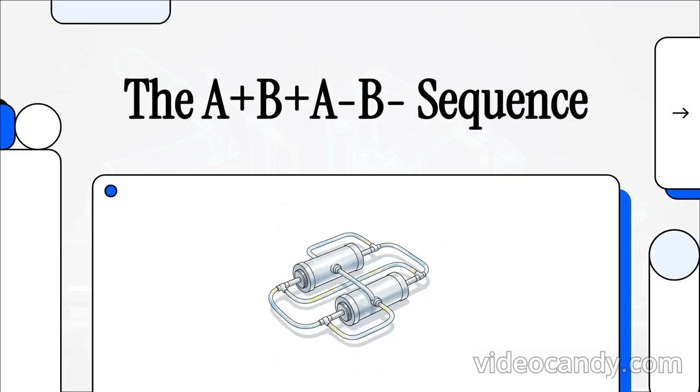All right, welcome. Today, we are diving deep into one of the absolute cornerstones of industrial automation, the A+B+A-B- sequence. We're going to break down, piece by piece, how simple compressed air and a few mechanical switches can get two cylinders to work together in perfect automated harmony.

So think about this for a second. How do you get, say, a clamp to hold a part, then a stamp to come down and mark it, and then have both of them release in exactly the right order over and over again without a single line of code? It's a classic problem in factories everywhere, and the solution is, well, it's surprisingly elegant. It relies on pure mechanical cleverness, not fancy electronics.

So here's how we're going to tackle this. First, we'll set the scene with the automation challenge itself. Then, we'll decode the actual circuit diagram, breaking the sequence into its two main phases. And finally, we'll look at how this awesome logic is used out in the real world.

Okay, before we can solve this puzzle, we really have to understand what we're dealing with. And that means defining the job we need to do and learning the special shorthand that engineers use to describe these kinds of movements. Let's imagine a really simple factory job. A machine needs to clamp a workpiece tight. That's cylinder A.

Then a second tool, maybe a stamp, has to come in and do its job. That's cylinder B. Now, what's absolutely critical here is that the stamp has to pull back before the clamp lets go. The order is everything. Get it wrong and you've got a mess. And this is how we write it down. It might look simple, but this little code is incredibly powerful.

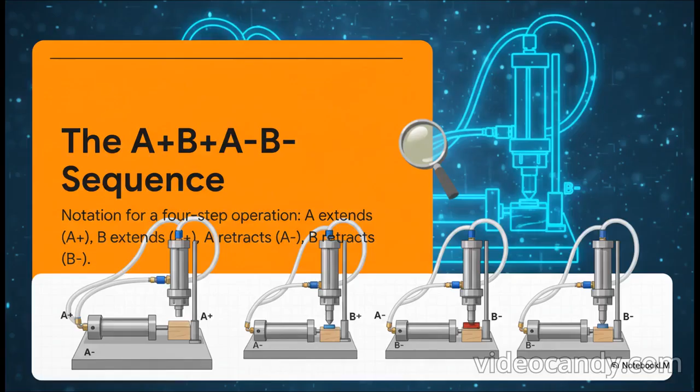A is our clamp. B is the stamp. A plus sign just means the cylinder extends, it moves forward. A minus sign means it retracts, it moves backward. So A+, B+, A-, B-. That perfectly describes our whole clamp and stamp operation.

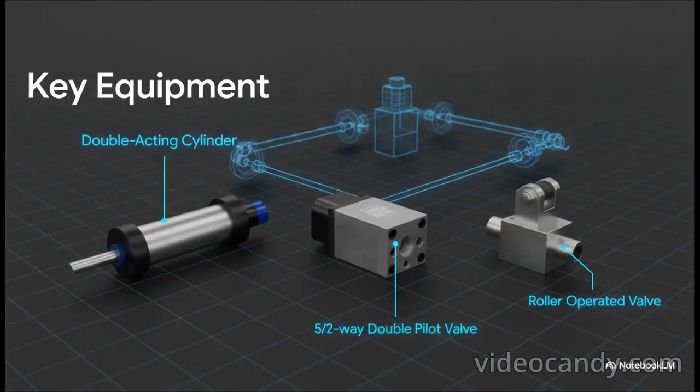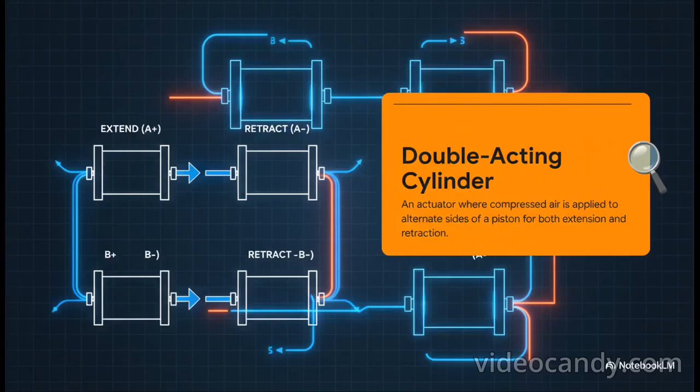These are the stars of our show. We have two double-acting cylinders. Those are the muscles that do the actual moving. Each one has a 5/2-way valve that's kind of like its brain. It directs the air to either push or pull the piston. And here's the really crucial part. We have 4 roller-operated valves. Think of these as physical sensors or tripwires. They're the ones that tell the system when a cylinder has hit its mark.

So what exactly is a double-acting cylinder? Well, it's pretty simple. It's a piston that can be pushed in two directions using air. You apply compressed air to one side to push it out, and then you apply air to the other side to pull it back in. It gives us powered motion for both extending and retracting.

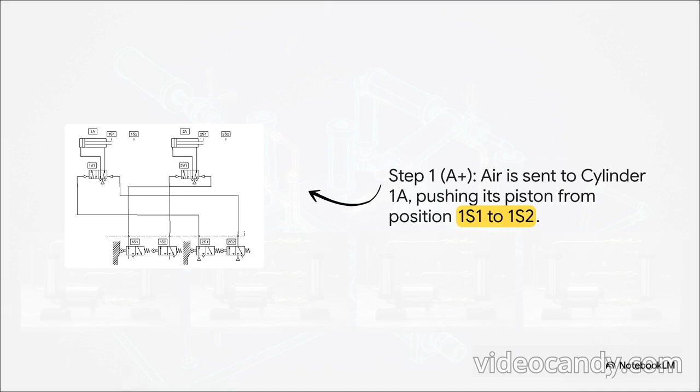Okay, here we go. We're kicking off the sequence. Now watch closely how the very first action automatically sets up the trigger for the next one. It's like setting off a line of mechanical dominoes. And we're off. Air flows to the main valve for cylinder 1A. That valve shifts, sending a powerful burst of air to the back of the piston.

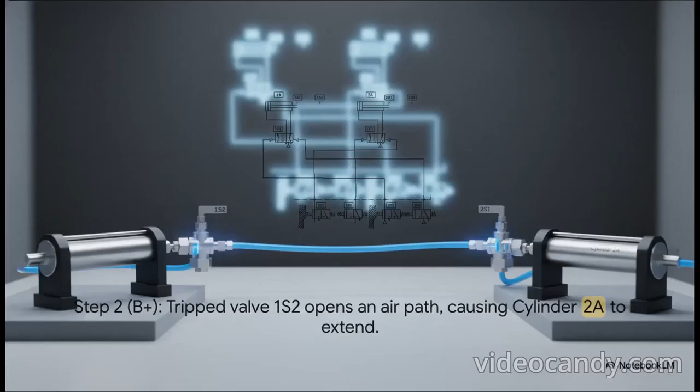This drives the cylinder forward, moving it away from its home base at switch 1S1 and all the way out towards its fully extended position at 1S2. Now this is the magic moment. As the piston rod of cylinder A gets to the very end of its travel, it physically bumps into and presses down on a little roller valve, the one labeled 1S2. This isn't some fancy electronic sensor. It's a direct physical mechanical action. And that action is about to open up a brand new pathway for the air.

And there's our chain reaction. That tripped valve, 1S2, now lets air flow over to the main valve of our second cylinder, 2A. This little puff of air is a pilot signal. It tells that valve to shift, which causes cylinder B to start its own journey, extending from its home at 2S1 out to 2S2. See? The first domino has just knocked over the second.

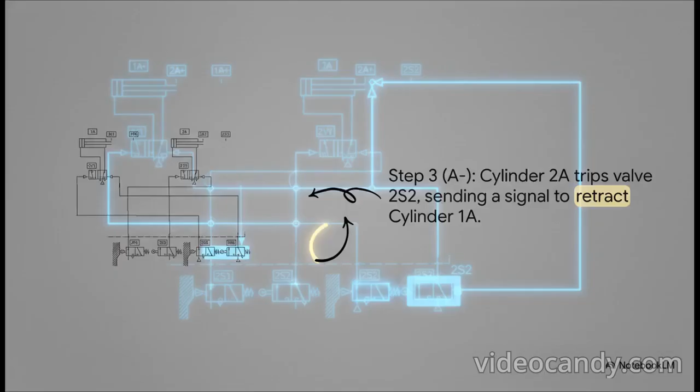So, both our clamp and our stamp are now fully extended. The job is halfway done. Now the system has to brilliantly reverse the sequence to get everything back to the starting line. You guessed it. Just like before, when cylinder B reaches its full extension, it trips its own limit switch, valve 2S2. This is our next trigger. The signal from 2S2 zips all the way back to the main valve for cylinder A and flips it back to its original position. Now air gets sent to the front of cylinder A's piston, forcing it to retract.

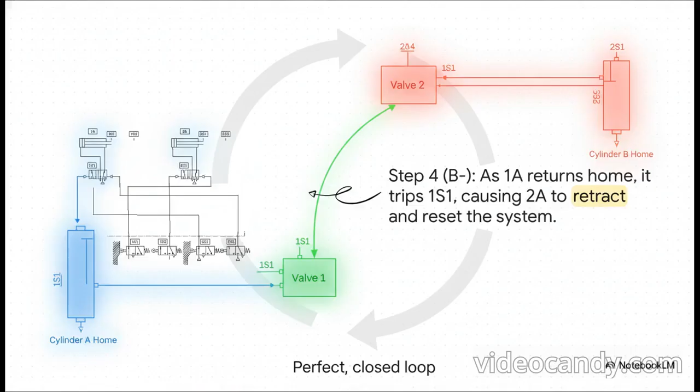Okay, we are in the home stretch. Cylinder A, our clamp, is on its way back in, but our stamp, cylinder B, is still hanging out there, fully extended. So what's the final piece of the puzzle that tells it to go home and finish the cycle? This is it, the final domino. As cylinder A arrives all the way back home, it hits that very first limit switch we started with, 1S1. That final mechanical tap sends the signal that flips cylinder B's main valve, pushing its piston all the way back home. And just like that, the entire system is reset, waiting for the next command. It's a perfect closed loop.

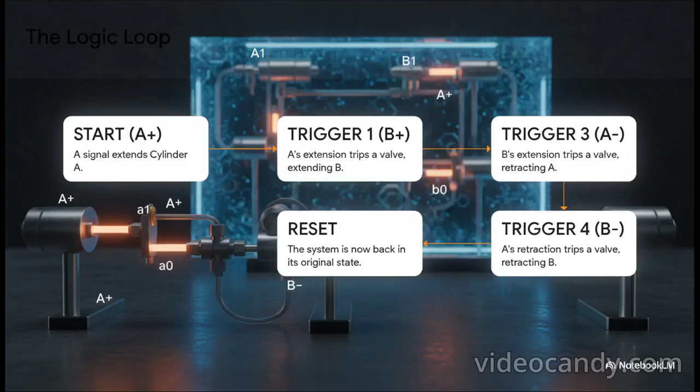So, we've just walked through that whole mechanical dance. Let's take a second to recap the logic and see why this kind of clever, computer-free automation is so incredibly important out in the real world. At the end of the day, the logic is just a beautiful cause and effect loop. A moves, which makes B move. B's movement then makes A return, and A's return makes B return. Each step is a direct physical consequence of the one that came before it. It creates a foolproof, endlessly repeatable sequence.

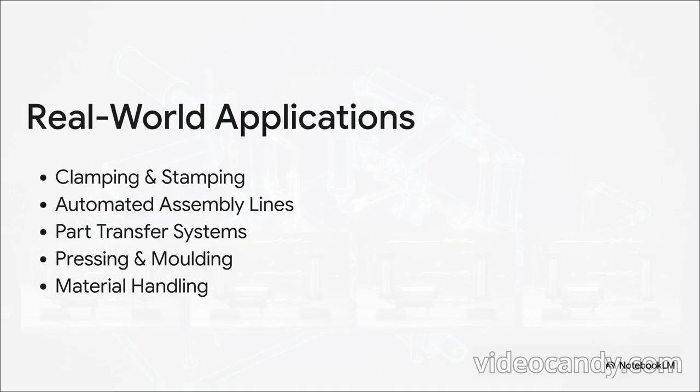And you know, this isn't just some lab experiment. This exact logic is the reliable backbone of countless machines you see every day. Anytime a machine needs to hold something securely, do something to it, and then release it in perfect order, you will find this sequence hard at work, from assembly lines to complex molding and part sorting systems. Really, it's just a testament to some seriously clever engineering. It is a perfect chain reaction. By using the physical movement of the machine itself to trigger the very next step, you create automation that's incredibly reliable and tough. It can work in dirty, harsh environments where delicate electronics might just give up.

So there you have it, the A+B+A-B- sequence, a true cornerstone of pneumatic logic. Now that you see how it works, what simple, real-world task could you imagine automating with just a couple of cylinders and some air? Give it some thought.